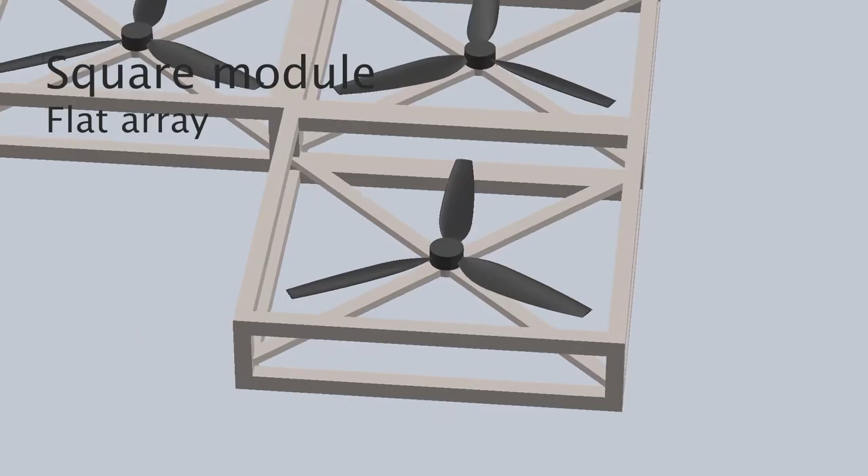Modular reconfigurable multirotor systems can adapt to various tasks and payloads by changing their configuration. These systems are typically designed with interchangeable modules that are assembled side by side to form two-dimensional array configurations. As more modules are added to an array, its relative thickness with respect to its size decreases, resulting in a diminishing structural integrity because of higher bending moments and larger deformations.

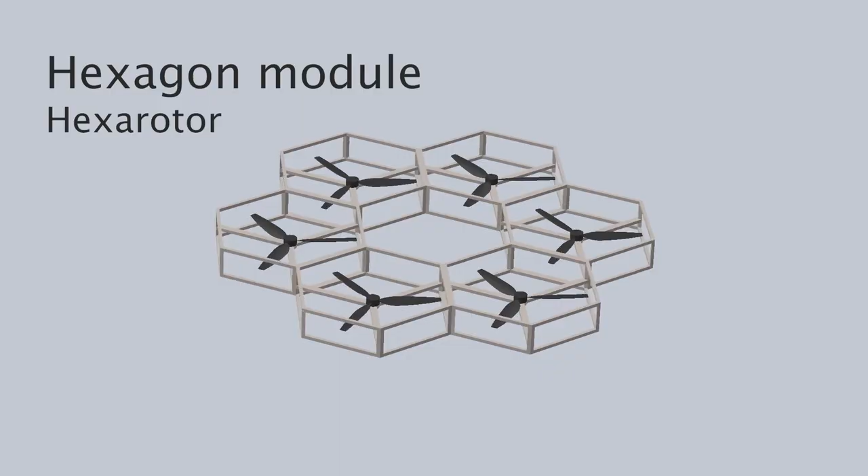In addition, with polygon-shaped modules placed in the same plane, the individual thrust vectors they generate all point in the same direction. But orienting modules in different directions would be desirable. For instance, to create more agile platforms or 6 degrees of freedom systems that can be used for object manipulation.

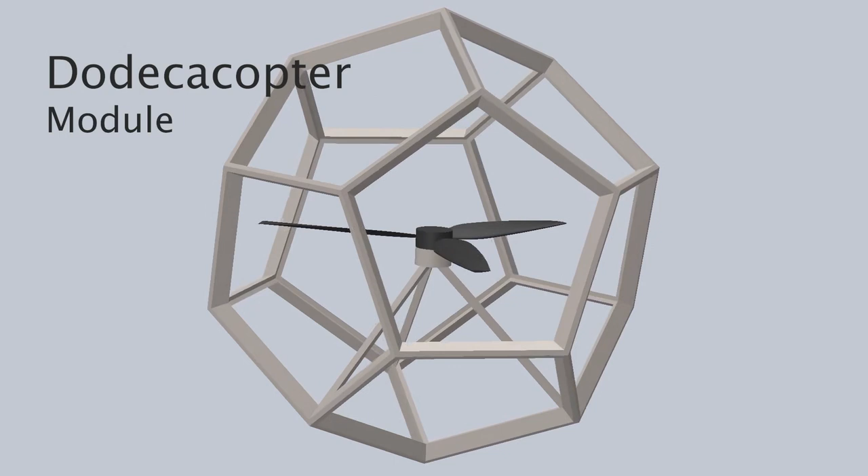To address these limitations, we introduced the Dodecacopter, a modular multirotor system whose modules take the shape of a regular dodecahedron. We developed an assembly method that allows us to orient modules in different directions, but also to create various three-dimensional configurations. Standard configurations like quadrotors and hexarotors can be created with this system, as well as flat arrays.

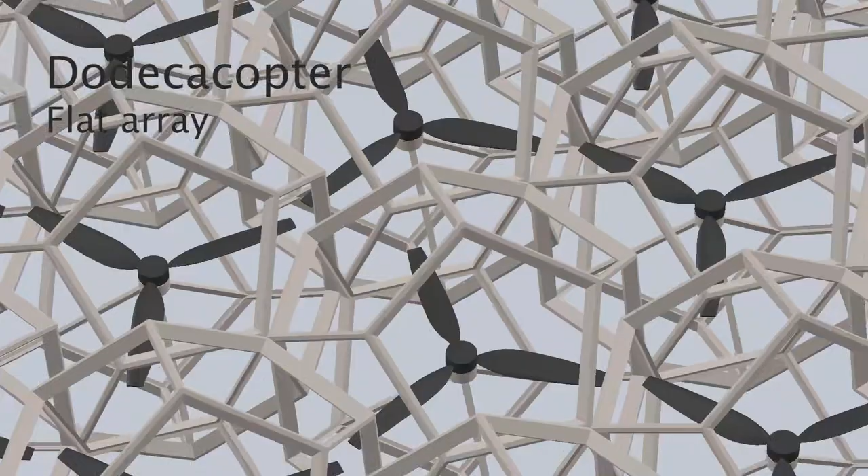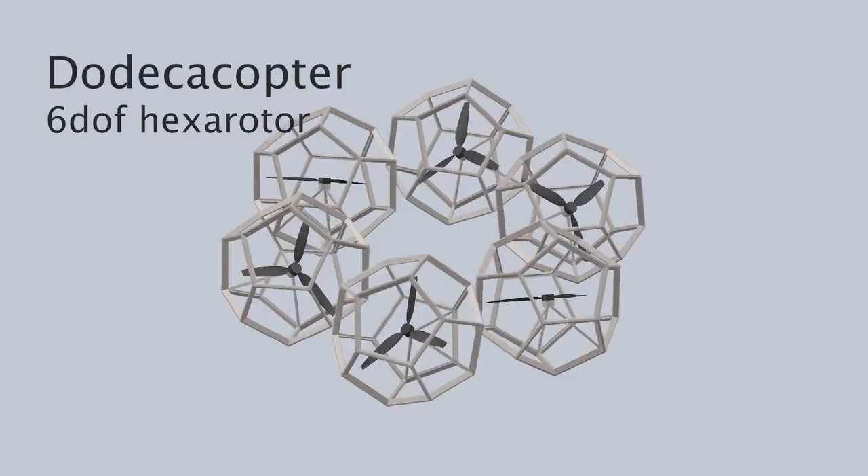Three-dimensional configurations based on tetrahedral blocks can also be created. These configurations have the advantage of increased structural integrity while maintaining a high aerodynamic efficiency from the absence of directly overlapping modules. The possible module orientations offered by the dodecahedron shape allow the assembly of 6 degrees of freedom systems, which in theory can independently control their position and orientation in space.

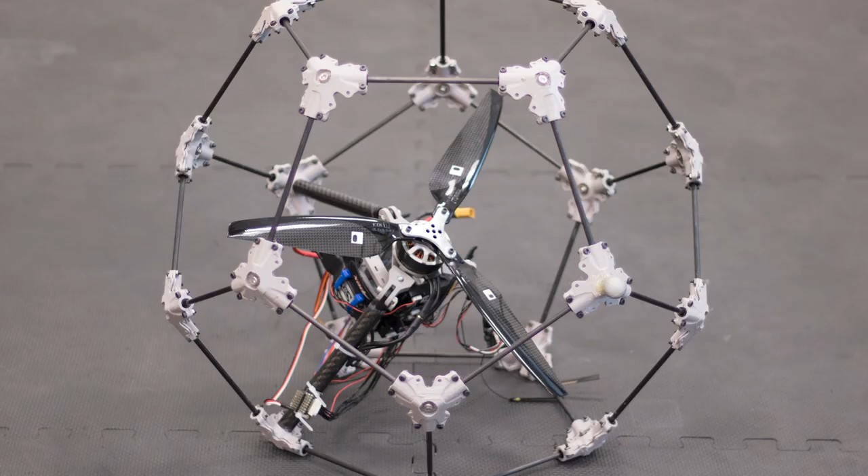In our work, we examined and optimized the control and structural properties of these systems, leveraging concepts from convex and mixed integer programming. A prototype of the Dodecacopter was built and tested in multiple configurations to validate the assembly method and feasibility of the proposed system. The configurations that were tested include a quadrotor vehicle, a hexarotor in a rotor-out situation, various tetrahedron configurations with 4, 10, and 16 modules, as well as a 6 degree of freedom hexarotor.